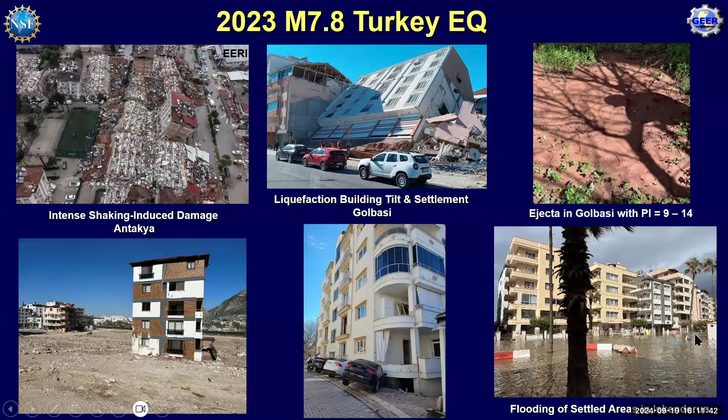The geotechnical engineering field, as those of you in it realize, is a very experience-based field. From Terzaghi and Peck and the late Professor Harry Seed as well, case histories are really the cornerstone of our profession. We learn so much from case histories because we simply cannot replicate in the laboratory or on the computer soil deposits that have been aged for thousands of years. And so field observations shape our understanding, and they provide the data that form the empirical designs.

And you know, Darcy's law is an empirical rule. I often hear people say theory surpasses all. Well, no, empiricism is important, and if it's well done, it can lead to great breakthroughs. So for example, whether liquefaction occurs or not, and many of the consequences of liquefaction, are based on field case histories where liquefaction was observed or not. And that's far better than a 40-parameter constitutive model for predicting the triggering of liquefaction.

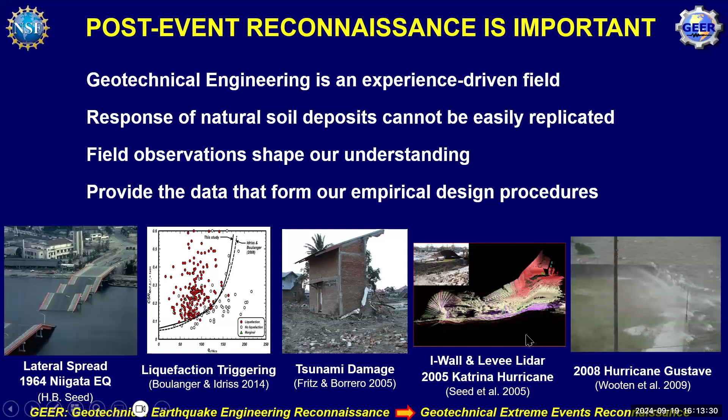Let me see if I can move this to an area that's less disruptive. Yeah. But it's personal.

This is the route I took home in 1989 on October 17th to watch the Bay Series, the World Series. San Francisco Giants playing the Oakland A's. How often do you have neighboring ball clubs playing each other? And so I, like many people, cheated and got home early. So I was in front of my television set in my apartment in Oakland at 5:04 p.m. on that Tuesday, when it occurred.

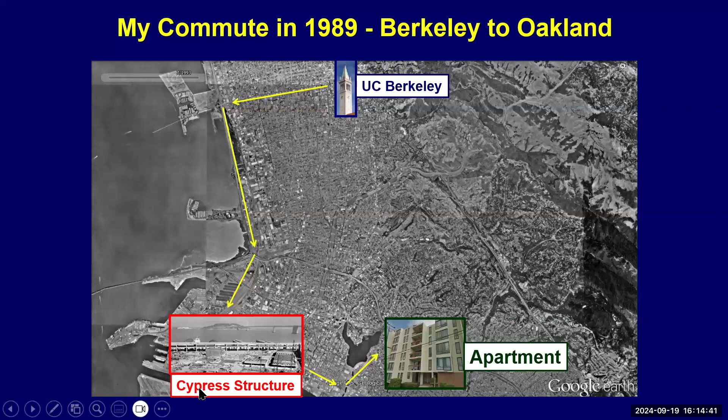If not, I probably would have been one of the people going home through the Cypress structure, which at 5 p.m. until 6 was essentially a parking lot where cars were backed up. There wasn't much traffic on that day because most people did what I did and got home early to watch this baseball game. And that saved a lot of lives. Not enough, because 42 people still perished because of the collapse of the Cypress structure. But it could have been much worse if it was a normal Tuesday

when we didn't have the World Series in our backyard. And you can see, and the structural engineers will talk about the non-ductile columns, and these are key issues in terms of structural engineering performance. But I think it's important to look at the fact that part of it collapsed, but part of it did not collapse. Same badly built structure, shaken by an earthquake 70 to 80 kilometers away, part of it collapsed, part of it did not collapse.

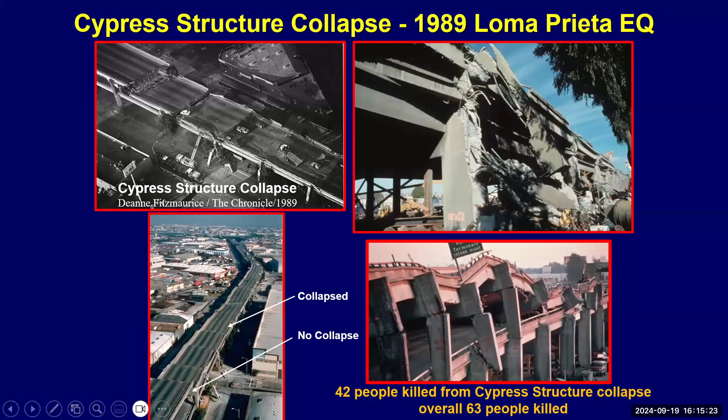You go back to the old maps, people liked Oakland, and so they initially developed Oakland on the stiff high ground, but they liked it so much they started filling in the marshes on top of the soft clay and built the city out. And you can see the fill area, so liquefiable soils on top of soft clay, that's the section of the Cypress structure that failed. So the foundation critically affects the performance of the structure. Another reminder of that, you can see the amplification of the low intensity motion on the soft mud versus the sand and gravel, which was stiffer.

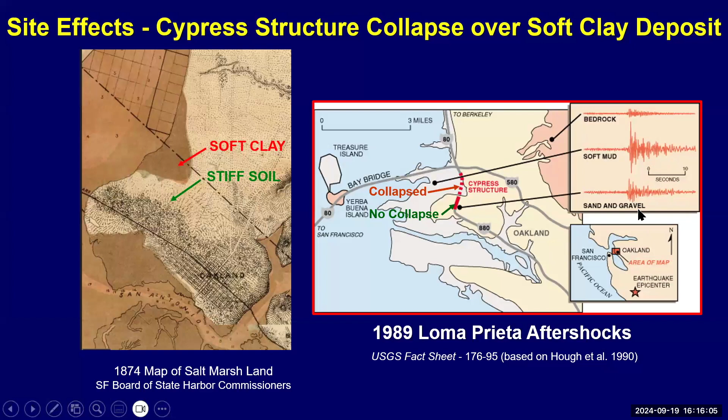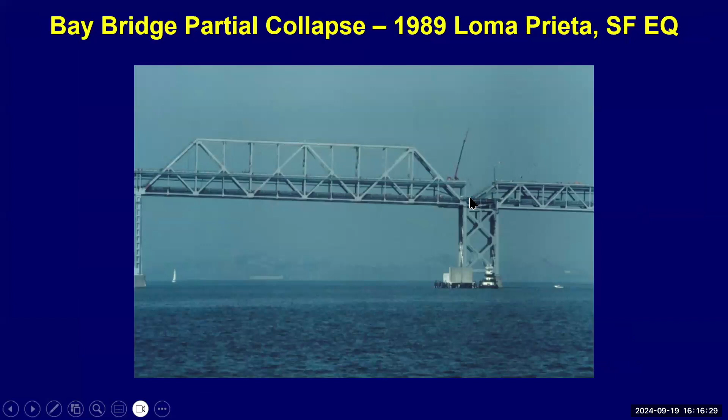And in fact, when I was listening on my radio after the earthquake, I had heard the Bay Bridge collapsed. Fortunately, only one section fell down, but that's another important issue. It costs several billion dollars to essentially fix this bridge and put a replacement in there, and a person died. But there are a lot of other bridge structures.

I was trained to do reconnaissance in the military. I was a Corps of Engineers officer. I served in Korea for 2.5 years, and much of my mission was reconnaissance. So I had a natural feeling of essentially getting on to bridge sites and being able to do reconnaissance, understanding roads and geology and those kinds of things.

One thing I learned, though, from my family of 9 kids and my parents, is never ask for permission. Everyone was sent to this bridge site, and they all asked the police officers that were guarding the bridge, can I access the site? And the answer was no. I showed up in my military uniform because I was still in the reserves. And I said, I'm here to see the bridge. They just passed me right through. And so I was able to capture this response. So better to ask for forgiveness than ask for permission.

The damage in San Francisco was severe. These are 4-story buildings. You can see the soft story collapse. And so there were issues, but there was more damage in the soil sites than there was on the rock sites. So the Presidio itself, the old fort, is a rock site.

There was a fire that was initiated by the liquefaction, and there was no ability to put the fire out because of the liquefaction breaking the water lines. So they were trying to pump water out of the bay to put this fire out. The fire marshal says he would not have fought that fire at the source if it was a typical day

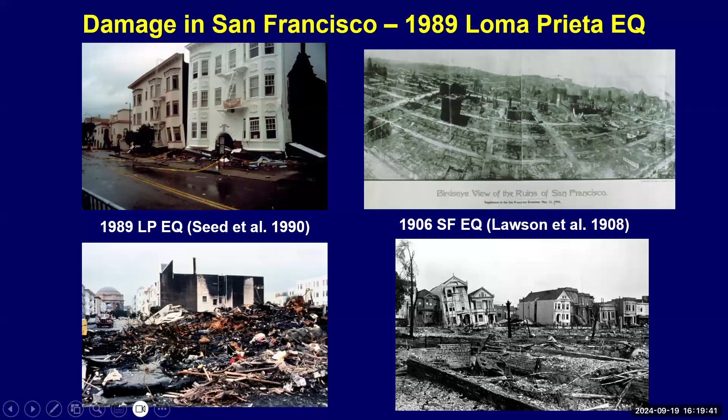Then we had the 1994 Northridge earthquake. The United Nations had declared that the 1990s was going to be the decade that reduced the harm due to natural disasters. Well, nature doesn't listen to the United Nations. And we had another earthquake. And much like the '71 San Fernando earthquake, there were devastating effects because of ground shaking on transportation and buildings and slope instability issues. That's one reason you can get a low rent, but that's not necessarily what you want to drive rents down in LA.

57 people were killed. Only 57, too many, but it was Martin Luther King Monday, holiday, at 4:30 in the morning. If it had been later in the day, the shopping malls and a lot of the garages that collapsed would have been full with people. So we've had 2 warning shots where too many people died, but it could have been much worse.

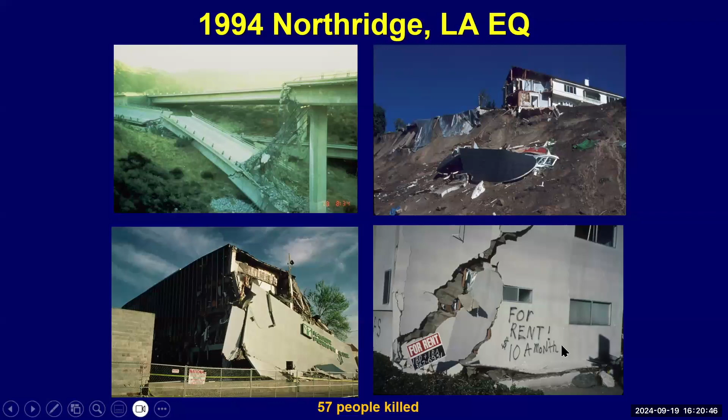The Santa Monica Freeway was the busiest freeway in the US at the time this earthquake occurred. One section, there's overpass after overpass after overpass. One of the overpasses collapsed. Why? The structural systems are the same. Anyone who understands Spanish, La Ciénaga, the swamp, okay, there was a softer soil. When we took the time and investigated it, this is where the soils are softer. So this continuing theme of soft soils amplifying shaking, causing ground deformations, leading to damage.

The scariest thing after the earthquake is what they found in the storage facility. They found RPGs, claymore mines, grenades. So I don't know what people are preparing for in Los Angeles, but that scares me more than an earthquake.

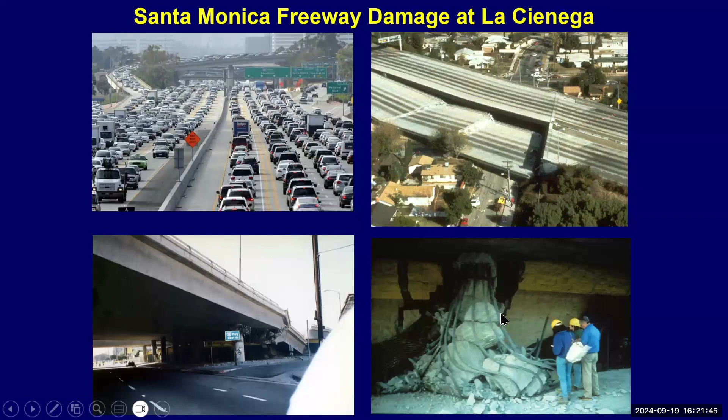We had several Japanese investigators come to Northridge and Loma Prieta and said, this is never going to happen in Japan. Japan is one of the world-class countries when it comes to earthquakes. And they normally were focused on the 1923 Kanto earthquake, where under Tokyo, they had a major earthquake offshore, and it devastated the area. It led to a fire, and it killed too many people, over 100,000. And most of the earthquakes since then that had developed their concepts of earthquake engineering were all offshore. It shakes for a longer time, but it's not a high intensity shake. This was a forward directivity shake that just hit with 1 or 2 big pulses and caused most of the damage.

My brothers used to play a cruel game called Slip the Rug. I'd stand on the rug and they would pull the rug out from me, literally, and I'd fall down to the ground. That's what older brothers do to teach you about life, okay? This is kind of a slip the rug.

The ground moved a meter in this direction and a meter back. Well, when it was moving a meter to the left, the bridge has mass, has inertia, wants to stay still. That puts tremendous demands on the columns, and that's what led to that failure. So ground pulses and near fault ground shaking, things we didn't even talk about in the 80s and the early 90s, now we realize we have to design for ground shaking in the near fault area.

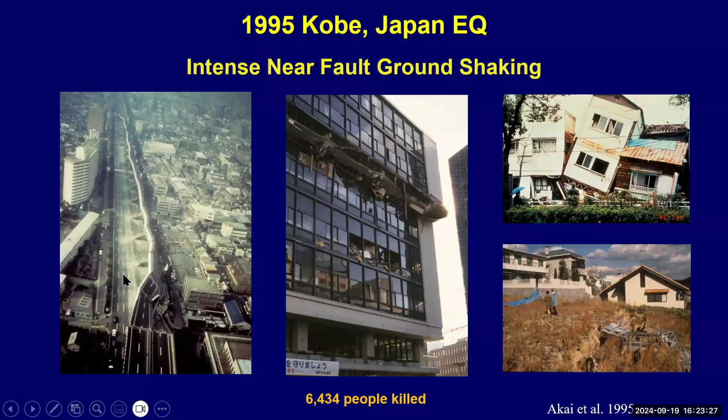6,434 people were killed in a country that has some of the very best earthquake engineers in the world. This is what that pulse felt like. You can see the time on the clock. It starts off at about 20 seconds, 21 seconds, 22 seconds, 23, 24. It's essentially not ground shaking over a long duration at a moderate level. It's one or two pulses. And if you can survive those, you can survive.

Your building can survive. And so much of earthquake engineering had focused on ground shaking from afar. Now we had this new thing called near fault forward directivity, transient ground pulse that we had to be able to withstand. But the most devastating thing actually was the fire. I remember going to this area and seeing a young woman put flowers next to the pictures of her parents who lived in the house, and it touches you. I mean, it's terrible to see a disaster, and you have to be mentally ready for it, but people die.

And think about Kobe, 1.5 million people, 6,400 people died. Kenichi Soga was actually a graduate student at the time, and he came with us and he interpreted. No one we talked to had not experienced death. They either lost a family member, a classmate, an uncle, a niece, and then you realize any death has terrible consequences, but 6,400 is unforgivable. We've got to do better than that.

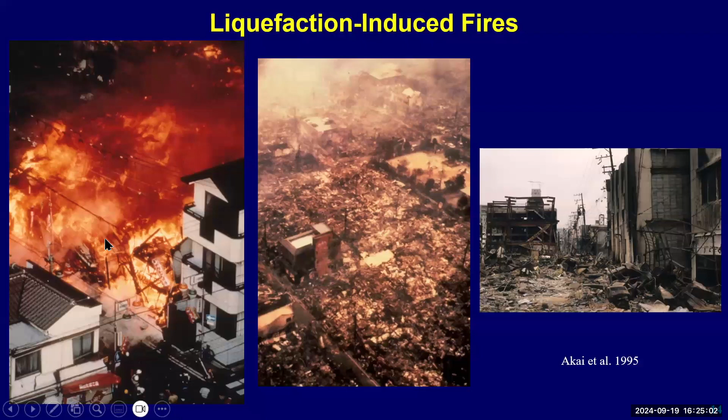I went as a young man, I was young at that time, and I just couldn't believe. I mean, major steel structures like this, and then plastic hinges and collapse, and deformations on the order of 3 meters where the ground moves toward the sea, and all of this sand is ejected from liquefaction. You can see the damage here in terms of the sea. 186 berths in Kobe. A fifth of their container traffic came through Kobe.

One person understood liquefaction and actually had retrofitted it to mitigate it. And those 6 berths were the only berths that were operational after the earthquake. All the rest were gone. Well, Kobe can rebuild itself. All that container traffic goes to Osaka. Now Kobe builds a good port. How many come back? Not all of them. So they're much depressed compared to where they were before because of that. So if you want your city to be sustainable, you have to make it resilient.

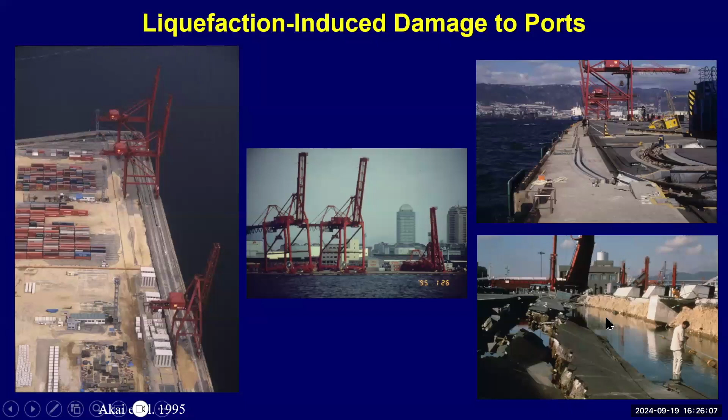But I walked around there, I was completely shocked. The subway, underground structures do well during an earthquake, but not if they're in an area of near fault ground motion with some softening due to soil liquefaction. I was one of 4 people that was allowed into the subway because Professor Tom O'Rourke knew Professor Hamada, who was able to get Liam Finn and Tom O'Rourke, myself, and Kenichi Soga into this to look at this. It was amazing. It's changed the way we do tunnel design in terms of looking at racking loading and understanding tunnels can fail. But I remember being shocked and thought, okay, I have so much to learn.

And I looked at the senior members of the group, Jim Mitchell and Ed Idriss and John Christian, and they were as shocked as I was. And so I realized this is a field that will never not shock me. And I've got a lot of work to do. And when I start feeling confident, I'll go on an earthquake reconnaissance like 2023 to Turkey, and I'll be shocked again.

So we had done those reconnaissance kind of ad hoc and done a good job. I'm proud of what we did, but we could do better. And so it was Cliff Astill who talked to me and said, you know, you guys are doing a great job. I really love what you're doing, but I'm not going to be here forever funding you guys. You should set something up. And so I wrote a proposal at the time, a single PI proposal, very small amount of money, I think like $125,000 over 5 years, to establish something. I didn't even have a name at the time. Post-earthquake reconnaissance. It became geotechnical extreme events reconnaissance.

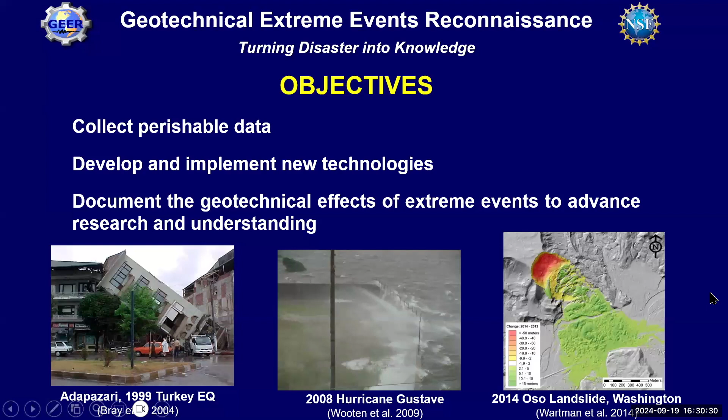It's been about people who were naturally going to go anyway, but to just organize and channel that energy and do things in a more systematic way and make sure that not everyone in the world goes to the same location to see the same thing, but we basically spread people out to capture the effects of the event.

Principles of reconnaissance. Safety. You have to remind people you cannot die. Rick Fragaszy told me several times, I love what you're doing, but if anyone gets injured or dies, no more money, okay? Yes, so it's amazing how sometimes we'll put ourselves in danger because we'll be focusing on something and we won't see that there's all these boulders on the ground at this site, came up from that mountain up there. If there's an aftershock, I got a problem. You got to be able to step away.

I talked about this lateral spread in Taiwan, really well done mapping, except for a big gap. I go, how did you miss this? We can't really have a first-class case history unless we have the deformations here. They said, well, there's tall grass there. I said, well, you could still see the cracks if you were careful. They go, no, John. They say they have a 3-step snake that lives in that grass in Taiwan. If it bites you, you have 3 steps before you die. I said, oh, you did the right thing. You did not die in collecting data.

You have to have a team approach. There's no loose cannons. There's no all about I. This is a team approach that we have to work together. The data is created by the Earth. It's owned by the Earth. It's not owned by you. So number one thing we said, you're not putting your name on any pictures. Anyone could have taken that picture. And it's the Earth's data. And we're National Science Foundation supported by taxpayer dollars. Everything has to be given to everyone. We've got to share. And we have to be ethical.

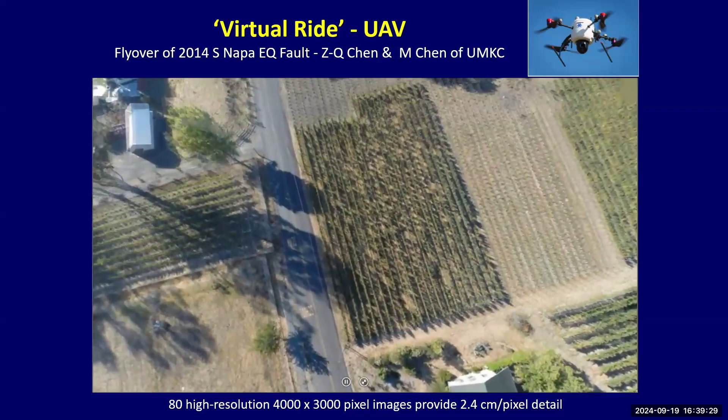Now we can all ride, because we can all get a drone and we can fly over. If you look closely here, you should see fault rupture right there. So South Napa had many effects, but one of the most important was fault rupture. But the idea is that a GEER team arrives on site, and it's so important to get that local area reconnaissance, so aerial reconnaissance. So you're not just guessing what's important.

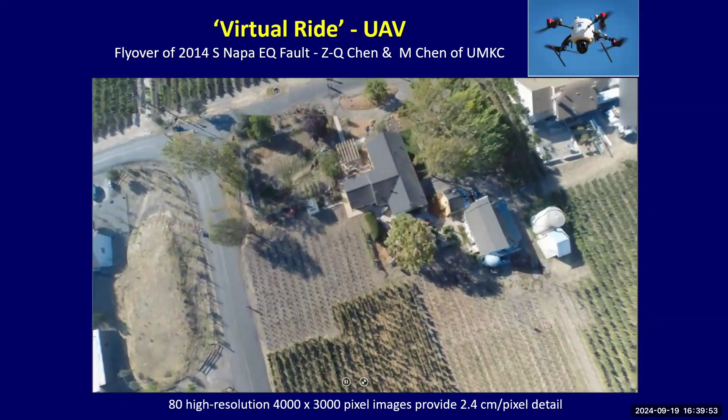You can fly over the site, and you can not only capture information and use structure from motion to get detailed maps, you can know where to go and where not to go. And so that's the new thing in terms of using UAVs to basically see the battlefield and be able to map out a strategy for capturing the effects. That's the fault rupture right through there.

And one of the incredible things is structure from motion, being able to have controls on the ground, fly it with a drone that's geolocated, and from looking at it from different perspectives, stitch together a diagram. This is from a scour event in Greece, but you could not walk on that bridge. It's unsafe to do so. You would never get those measurements, but now you have those measurements. Every pixel has good accuracy in terms of X, Y, Z.

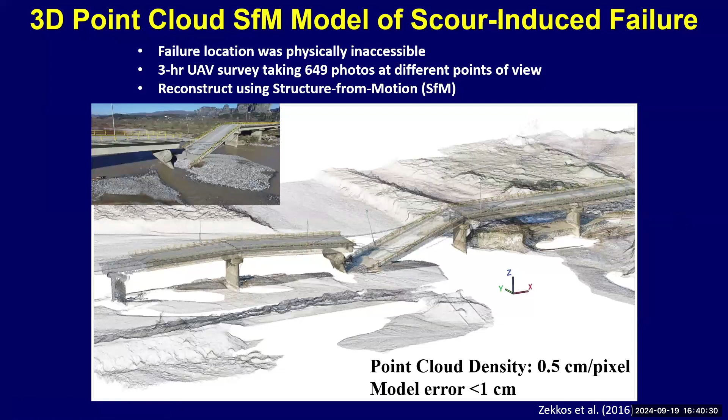And then Diane Moug brought a LiDAR set to Turkey when we went in 2023, and we're able to capture in just about a minute something that would have taken us forever to document all the details. Every one of these pixels is placed in terms of X, Y, Z with good accuracy. And we can see things like, we obviously see a little water here, and it's punched in. So you know that and you can see some warping. You can see the fence between the buildings being dragged down by the buildings. And this is something I had not seen before.

And you needed the detail of LiDAR to notice that the buildings didn't just punch down like they normally do. They dragged the soil next to them. And there's a building that was heavily damaged, a light building, where the big brother punched down, dragged the ground down, which then distorted the other structure and damaged it. So now we don't have to just worry about liquefaction effects on your building, but how it may actually cause damage around it. And that's captured very nicely in all these case histories with these LiDAR images.

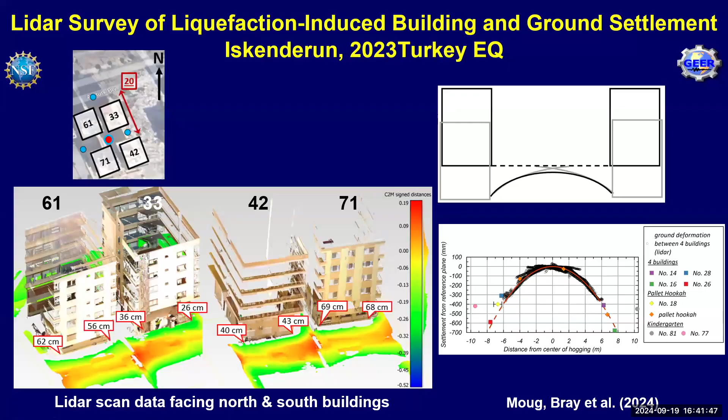Remote sensing is really important. In fact, when I was in Chile, we did not know about this tailings dam failure. And in fact, we had to talk to someone. We had heard some information about that, but mine operators are not going to say, hey, by the way, world community, we had a tailings dam failure, and unfortunately, we killed 4 people. We're not going to advertise that. So a lot of tailings dam failures in the past have gone unnoticed.

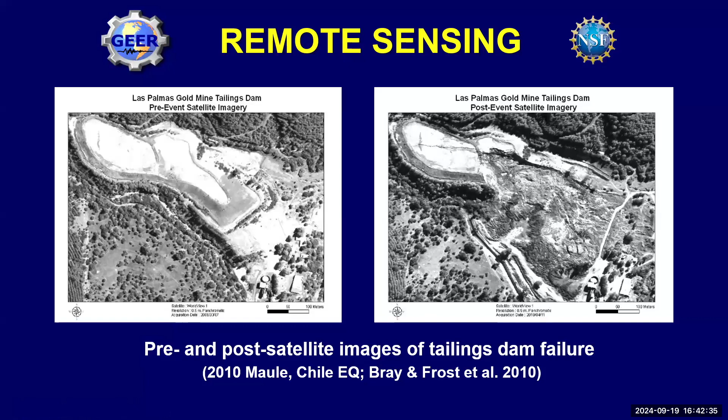But now with remote sensing and satellites, you can see this. You can see what it was, a closed upstream dam that liquefied and flowed down. And so it took about 4 hours from the main highway to get to that site, but we got to that site, and we were able to document that as a case history and a flow failure.

Google Earth revolutionized the way we do things. When I went to Turkey in 1999, we had so much difficulty getting maps. The best maps we got were from a Russian website that, because the Cold War was over, he could sell all these topos of Turkey.

I don't know why Russia cared about Turkey, a NATO ally, but we had these incredible DEMs, but a lot of information was missing. And in fact, the city of Adapazari, we had no map. So how are you going to map the earthquake damage when you have no base map?

I went into the office of the mayor and he said, I cannot share any map. But I have my camera down here. And so I took a couple of pictures of the map behind him on the desk and then brought it out and we blew it up and that's what we used, okay? I'll admit that today, and I'll admit that only because I'm out of Turkey and they can't throw me in jail.

But here's the 26 February Google Earth image that you could pull off your computer and look at the liquefaction. You can see the sand boils. You can see, unfortunately, this collapsed building. And so you hit the ground running. You already have a sense of what happened on the 22nd of February, 2011.

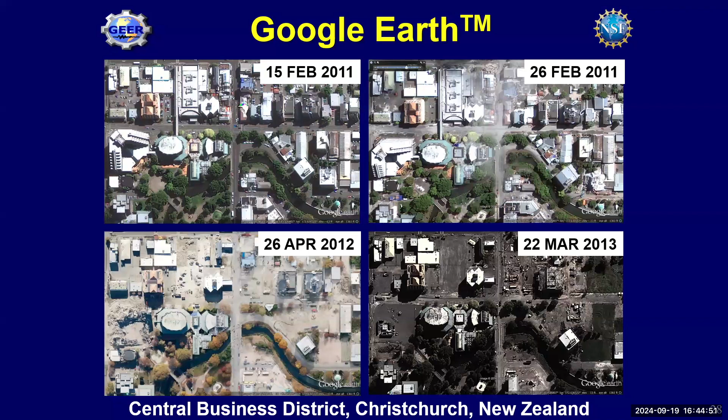I mean, there's still buildings in Christchurch, New Zealand, I was just there in August, that looked the same as they looked on February 22nd, 2011, which is too slow a recovery.

So we have all of these security cameras, but we also have human beings that are incredible scientific instruments who have cell phones that take pictures of this stuff. And so mining this data is an incredible opportunity to learn from.

But in the last part, I wanted to just talk through some of the earthquake reconnaissance efforts I've been on, post-earthquake or post-natural disasters, extreme events. One of them is Adapazari. I highlighted in yellow the names of all the Turkish engineers. We could not have done this without our Turkish engineers. It's so important to reach out to the country that's affected, let them grieve, but then have them participate so that you can capture the data.

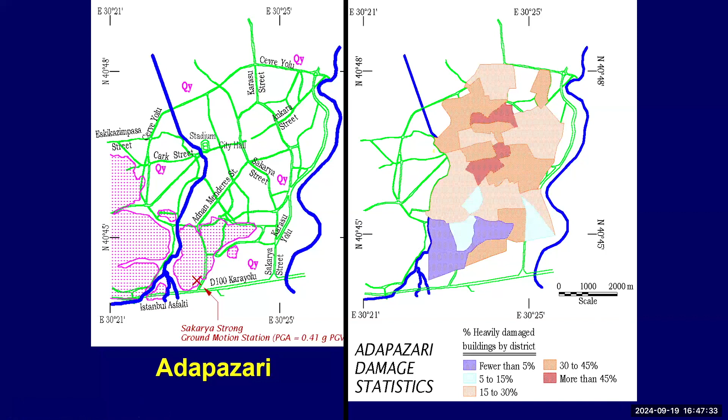And the classic case, this is rock, this is soil. Rock had fewer than 5% collapse. The soil had high percentages, at least 15%. In some cases, more than 45% of the buildings were damaged. So now the issue is to understand why the damage was almost 50% in some districts and only 15% in other districts.

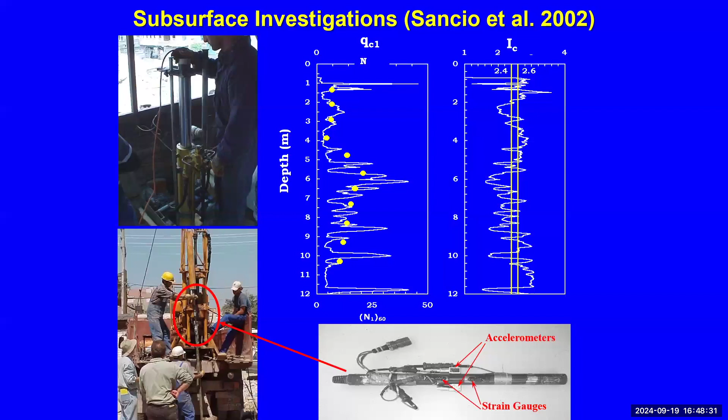Then you always have time the next summer to go back and do cone penetration work, followed by some SPT testing with energy measurements. You collect the subsurface data. Then you do your liquefaction assessment, and you go, okay, it's not surprising. This is not supposed to liquefy, and it didn't liquefy. And the building damage, badly built buildings were still damaged on good ground, but the rate of damage was less than the buildings that were on liquefiable soils, especially if there was liquefiable soil on top of deeper liquefiable soils.

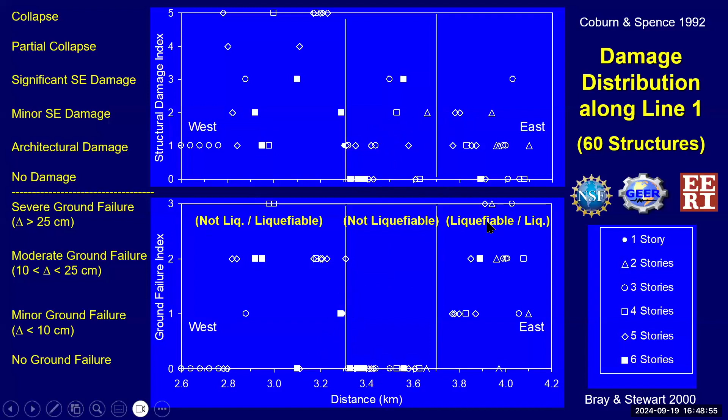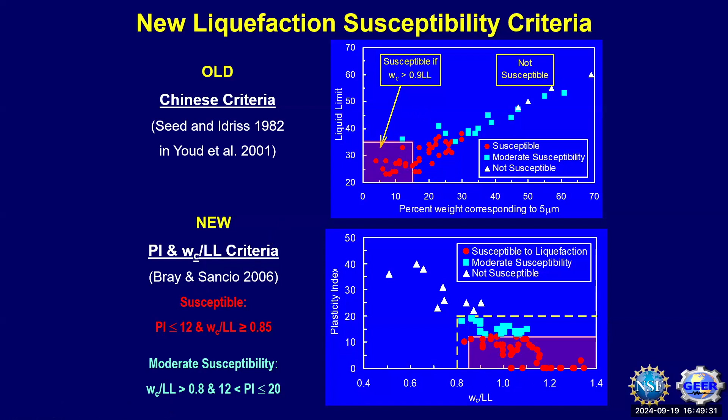But you had to make a change. The Chinese criteria, which was used in Youd et al. as the state of the art, was wrong because it looked at the percent of particles, and you can have a silt particle that is clay size, it's a silt. And that's why Casagrande didn't use size for silt and clay, he used Atterberg limits. And so an Atterberg limits or PI-based criteria better captured the data. And so those observations led to the PI-based criteria that's now used for liquefaction susceptibility.

Chile in 2010, again, could not have done this without Ramon Verdugo, Christian Ledezma, and Terry Eldridge, and all these other people, and the Chilean Air Force. There's always somebody who has an uncle who knows somebody in the Chilean Air Force. They want to go fly the site. They don't really know where to fly. We go, wait, we're engineers. We can kind of tell you where to fly. So let's get together. And so we get a free flight on the Chilean Air Force to fly over the zone to capture that overview.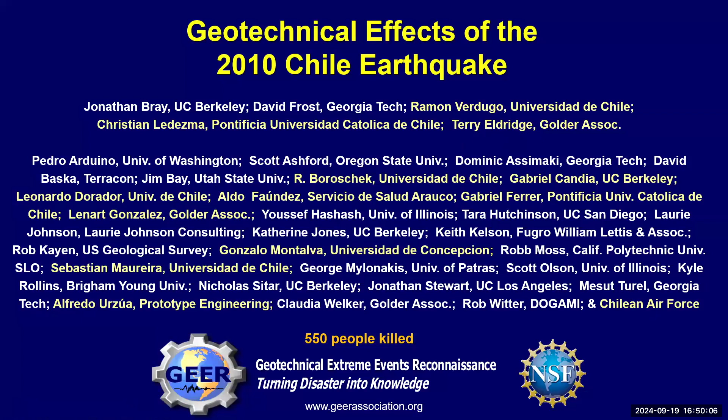This was the big earthquake because we didn't know the Tohoku earthquake was going to happen. We had all these kind of normal earthquakes that were relatively low magnitudes, 6.7s and 6.9s, even 7.6. This was a magnitude 8.8. So duration, we care about that for places like the Pacific Northwest, where they fear they're going to have a large magnitude subduction zone earthquake.

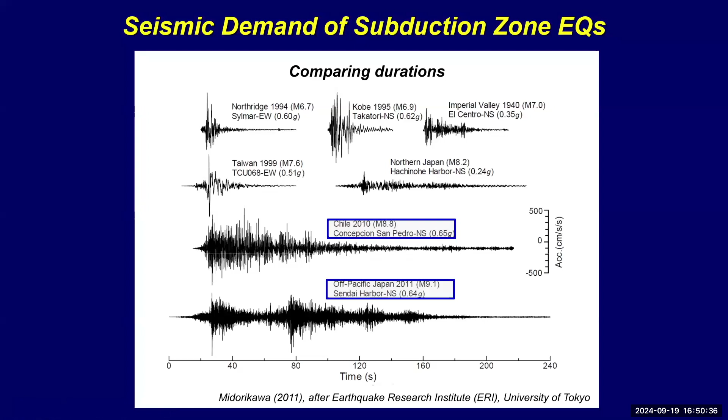I felt like I was doing reconnaissance for the Northern California 89 earthquake, the Southern California 1994 earthquake, and the Desert Landers 1992 earthquake all at the same time. I had done reconnaissance on those three earthquakes, and all of a sudden I land in Chile, and I realized the area that's affected is hundreds of kilometers long. And so without that air reconnaissance, we could not have collected the data we collected. We needed our Chilean partners, and we needed everybody to basically download where they had been. So I got their track logs, so I could look every night on where everyone's been, and send them out kind of orders for where they need to go the next day, because you need boots on the ground.

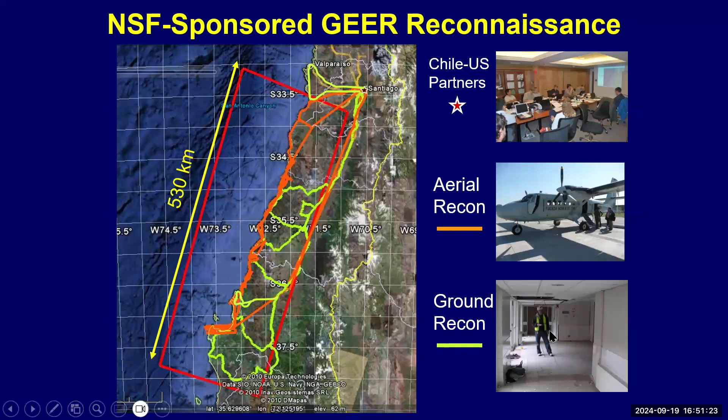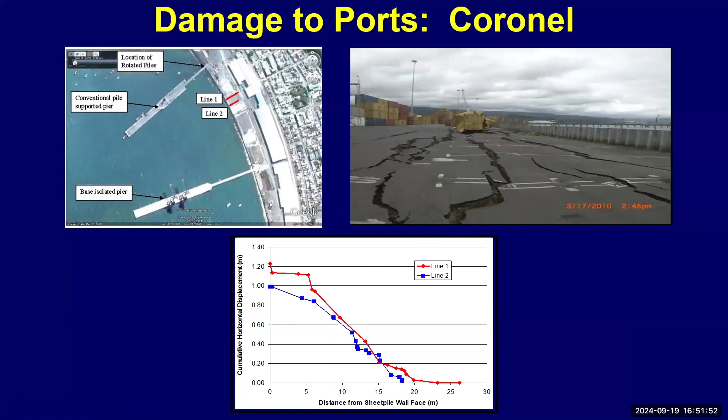It's another country that's dominated by ports, and so capturing liquefaction-induced lateral spreading, you can see the lateral spreading because the ground liquefies, it wants to move toward a free face. Capturing this then becomes a case history. And the lateral spreading method that we still use today is case history driven because it's too hard to do advanced numerical analysis to capture all the aspects of void redistribution and pore pressure migration with today's models.

This is something I had not seen before that transportation departments should care about, is liquefaction along a column. This is a sand boil. You lose the support and it basically punches down. It goes down about a half a meter to 3/4 of a meter.

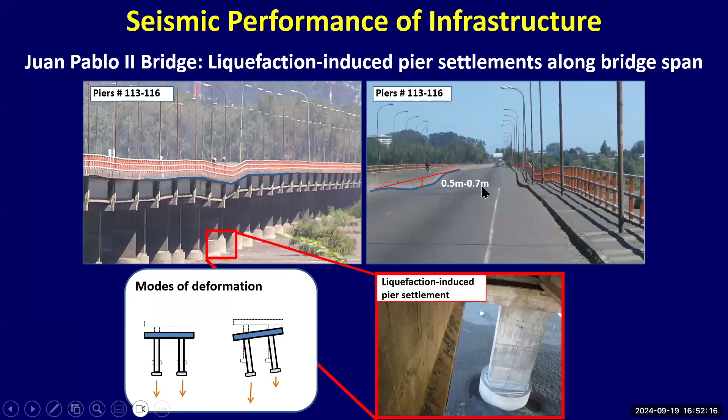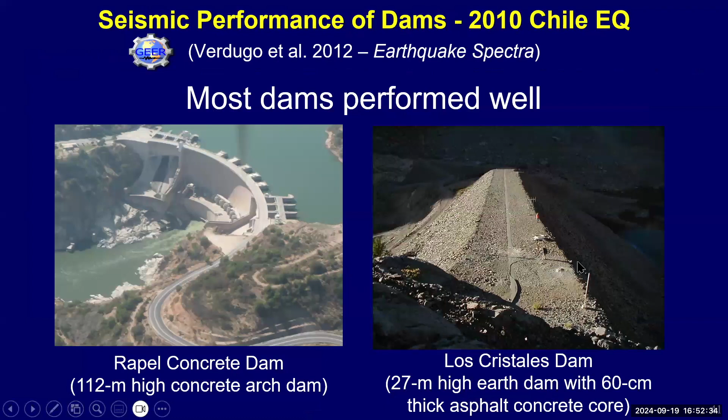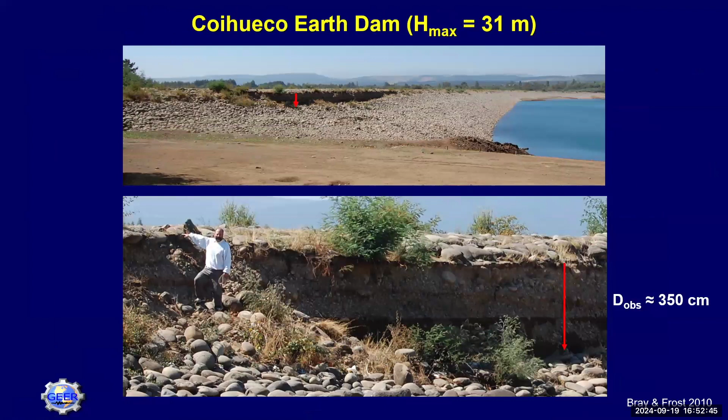But it's really important to step back and not just focus on failure, but performance-based earthquake engineering demands that you look at performance of good. For example, many dams, most dams in Chile did well. But we found the one earth dam that did poorly, and this has a silty clay foundation. It's not liquefaction. It's basically spread out on top of that softened material.

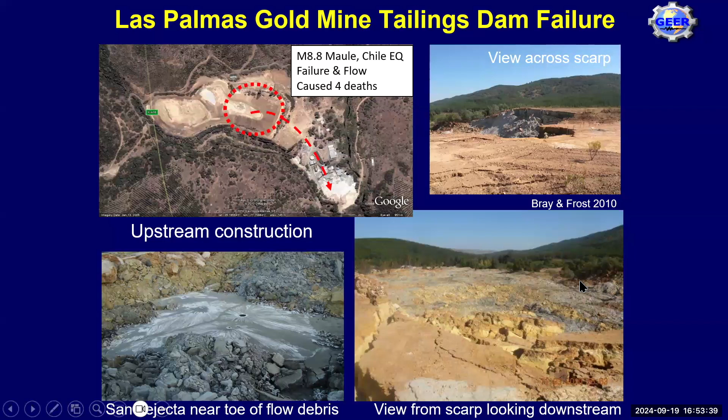That was the Loma Prieta earthquake and the Northridge earthquake. We felt those aftershocks after the earthquake, and that tells you you can't just worry about the main shock. You've got to think about the aftershocks. And if you go to a site and you map a lateral spread, and there were significant aftershocks before you got there, how much of that ground movement was due to the main shock and how much was due to the aftershocks? And that's why you want to get there as soon as safely and appropriately possible. You don't want to be there when people are doing the life safety mission, but you want to be there a minute after that mission's over.

And I'll end with the Canterbury earthquake sequence. And in fact, we talk about earthquake sequences. I talked about the Loma Prieta earthquake, the Northridge earthquake. Here we talk about the sequence of earthquakes. So now we don't just focus on one earthquake. We realize sometimes one earthquake puts strain on the fault that's adjacent to it, which causes another earthquake and another. And we have to think about sequences.

This had a magnitude 7.1 in September of 2010, caused liquefaction damage, nobody died. Then a magnitude 6.2. So a magnitude smaller, but it was right next to the city. Ground motion was more intense. Unfortunately, 185 people died and more damage. Then they had the June earthquake. Then they had the December earthquake. Then they had the Valentine's earthquake.

There are people that left Christchurch. It was the second largest city. It wasn't after the first earthquake; people said, I'm done. I'm out of here. I was doing centrifuge tests at Davis where I would make a model. It's so expensive to make a model. I'd shake it once, shake it twice, shake it three times. I left Davis because they were doing full-scale shaking table tests in Christchurch. That's what nature was doing.

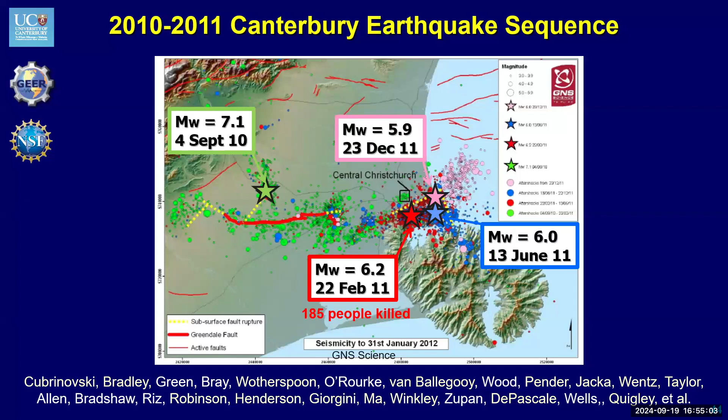Massive liquefaction. This looks a little bit like Buffalo. So Clarkson, you should know that. This is like Buffalo after a snowstorm, okay? But it's sand. This area actually settled about a meter. There was like 30 centimeters or more of ejecta on the ground.

People, when I first got to Chile, they said, don't worry about liquefaction. We have so many earthquakes. Everything's liquefied and densified. False. The places that we looked first in '89 were where there was liquefaction in '06, because the ground that liquefies is born again. It basically liquefies and it pluviates through the water. It's loose, it's a fragile fabric, it's a prime candidate.

So what does a New Zealand geologist do when liquefaction hits his home? He goes and takes a picture and he thinks he's done. Then he has a bigger shake. So he goes back to the same location and takes a picture. There was a 4.6 aftershock. He goes to the same location and takes a picture. There was the first part of the June earthquake, a magnitude 5.2. Then the magnitude 6 occurred. So liquefaction is most likely to happen where it's happened.

It's one thing when liquefaction takes your car, your ride. It's another thing when it takes your throne. And in fact, what reminded me of this was Katrina, because we think of earthquake engineering and liquefaction as being a solid mechanics problem, but I realized this was a flood event. People who had just moved back into their houses because they had damage from the September 4th, 2010 earthquake basically shared the holidays together. They kissed their significant other on Valentine's Day. And then on the 22nd of February, they had not only a liquefaction event, but they had a flood event. Everything on the floor was flooded.

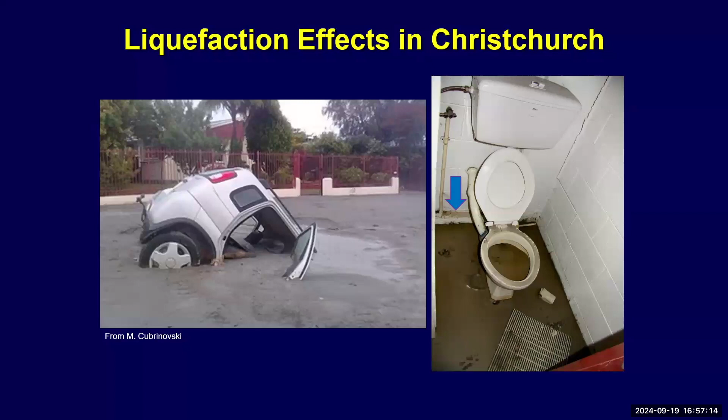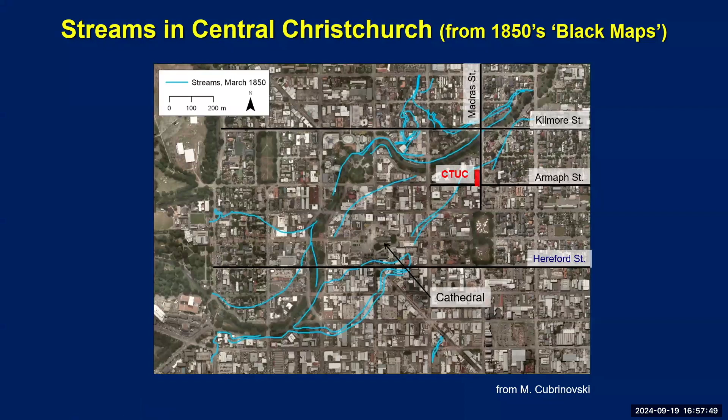Before they buried it to build the great city of Christchurch, a geologist mapped the streams that existed in 1850. You go back to those and say, okay, these have all been covered now, because we still see the Avon River, but this has been covered. But this is probably still there, and the buried stream has now re-emerged as a liquefied sand that's leading to more damage. And I found a book called Christchurch, Swamp to City. And it was interesting to see how that city had been developed over those years.

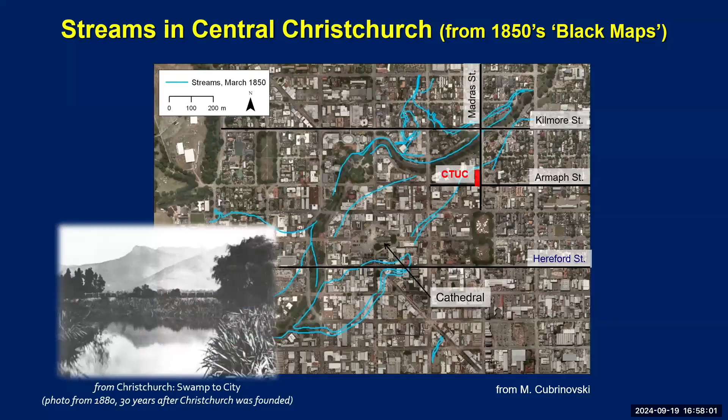This building, I used levels. Now we maybe use LiDAR, but at that time I didn't have access to LiDAR, but a team with proper laser levels and such can do a detailed survey. This building had not settled. There was a pipe that was detached, so we had a very precise measurement there. That's actually from that.

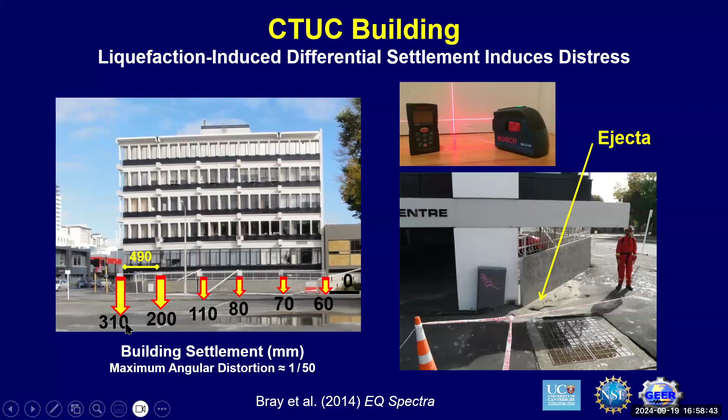And then we were able to do a measurement inside this garage, the first level, and see, okay, there's about 60 millimeters here, and there's 310 here, but it's very large differential settlement, about 100 millimeters extra for every 5 meter long bay. And that is where we saw ejecta.

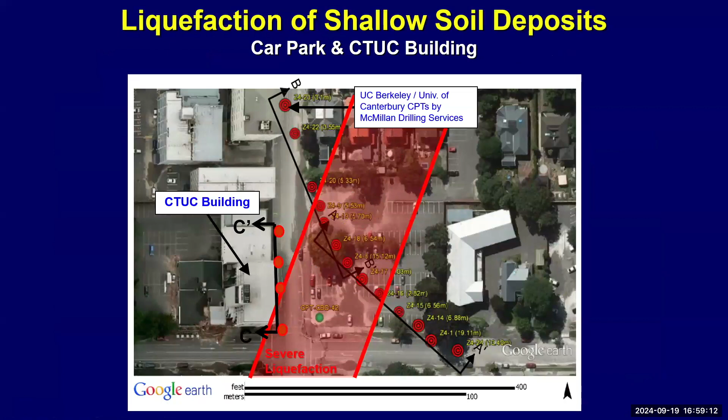Then there's a parking lot here, so I do closely spaced CPTs, and guess what? I find a shallow buried stream. You can see the ejecta here that just cuts the southern part of that building, and that's the area that had the massive liquefaction. So look at the geology and realize streams that we have buried are going to reemerge and cause problems when there's an earthquake that causes liquefaction.

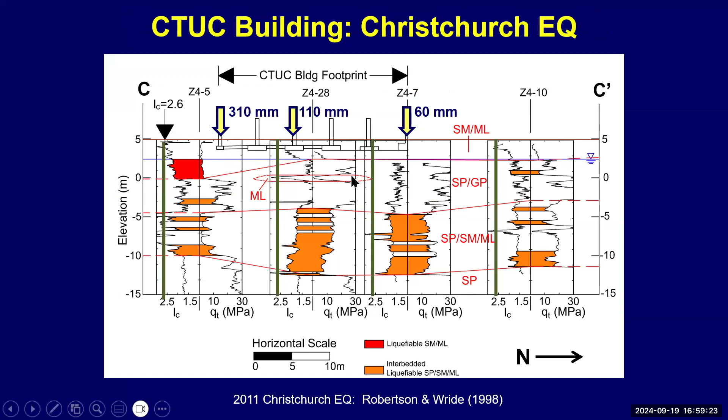This analysis now with the CPTs, we can show this buried stream channel, areas where we do not have liquefaction that's shallow. We get some liquefaction at depth, but not shallow. We can model it as a case history, which we're not going to get the right answer unless we capture that loose layer. We can capture bearing capacity. We could say that the north side is going to settle less than the south side. And we can actually get the wrong answer, because this is how much was measured. And with our uncertainty, we're getting this.

And then you realize ejecta, no continuum model captures ejecta. So if we had matched it with a computer program that had a model that did not capture ejecta, we would have had the wrong answer. So then we go back and realize, let's just look at the shear deformation. This is the shear deformation in green. And this is the shear deformation calculated by the program that can handle bearing capacity and shear, but cannot handle ejecta. And so actually getting the wrong answer is the right answer.

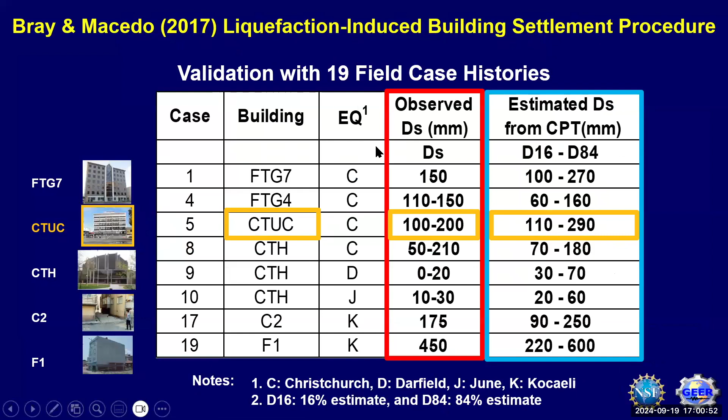So remember that when you're doing an analysis. If you're doing an analysis with a program that cannot capture a mechanism, and that mechanism is important, make sure you don't get a match with the total answer. This is one of the cases that we use to calibrate the Bray and Macedo liquefaction-induced building settlement procedure, and that procedure is only possible because of the case histories that give us confidence that this method can work.

So in conclusion, well-documented case histories, especially in geotechnical engineering, advance our understanding, but are important in structural, environmental, and other areas as well. GEER and these kind of things have always got to be grassroots. You cannot have an upper leadership telling people where to go. You got to listen to the masses and follow them as they lead.

Because so many of the great innovations I talked about today were individual GEER members getting together and going, I think this is a better way of doing it. But you have to have standards that you get together and say, okay, well, this is a new technology, but here's how we're going to implement it.

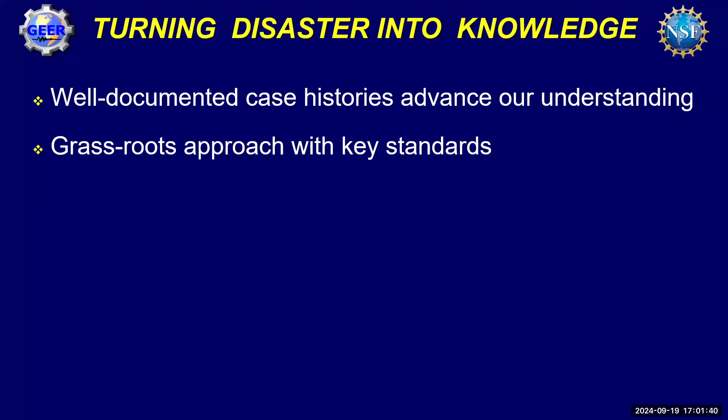Google Earth allows me, like before I had gone to that area, I've been to Santiago, but I had not been to Concepcion, which is an area of major damage. I walked the ground virtually when I was at home. When I got there, it wasn't the first time I'd been there. I'd been there virtually.

Remote sensing, LiDAR, structure from motion, they're so important for capturing these things. But it's critical that we systematically, every photograph, every map should be geocoded. It has to have the GPS coordinates. You have to reoccupy it. We had Rob Kayen, who had gone around earthquakes, say, I'm going to go back to places where there were earthquakes with ground failure and not ground failure, and I'm going to do shear wave velocity measurements, so I can develop a shear wave velocity based

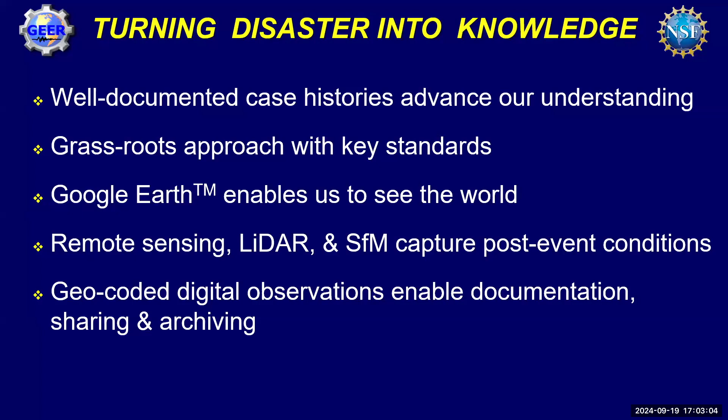liquefaction method. He did a study on past earthquake reconnaissances and realized liquefaction happened somewhere, but he had no idea where it happened. So it's critical that you not only put the GPS coordinates in there and the time and the date, but you put a reference to where it is so that people can reoccupy that site so that you can continue to learn from it. It also makes it effective for documenting, sharing, and archiving.

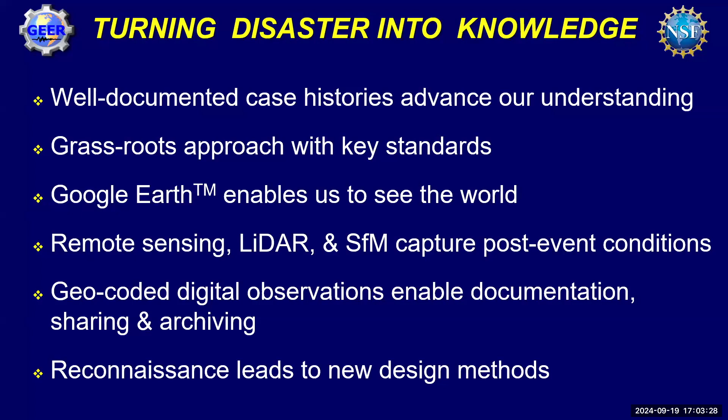And then last but not least, I hope I've convinced you that many of the things that we do, not just in earthquake engineering, but also runout of landslides and storm surge effects, it's reconnaissance of these field observations that then lead to these design methods that we use today and we're going to continue to use for the foreseeable future. Thank you.